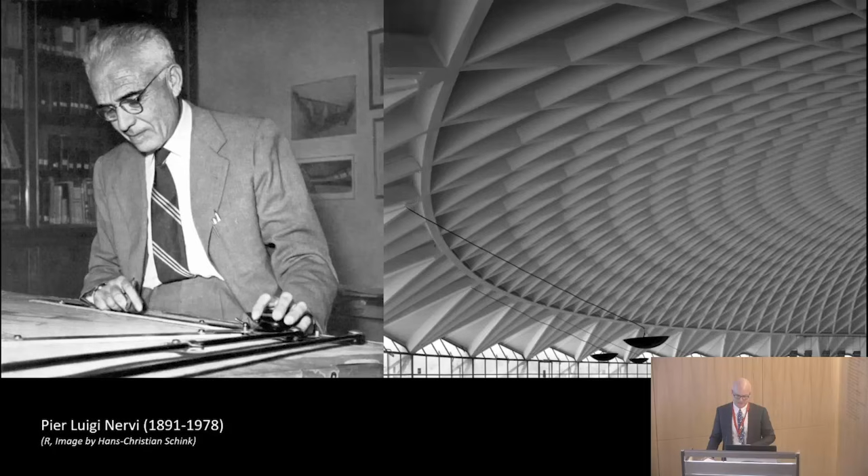And putting these two together, I say, look, one of these buildings is relatively small. The other one is huge, a record-breaking span. One of them is much beloved by everyone who walks into it, engineer, architect, sports fan. The other one was demolished just 25 years after it was built because it was so unloved, right? So sort of unbeautiful. And an incredible achievement. But the difference between these two, I think, is worth considering.

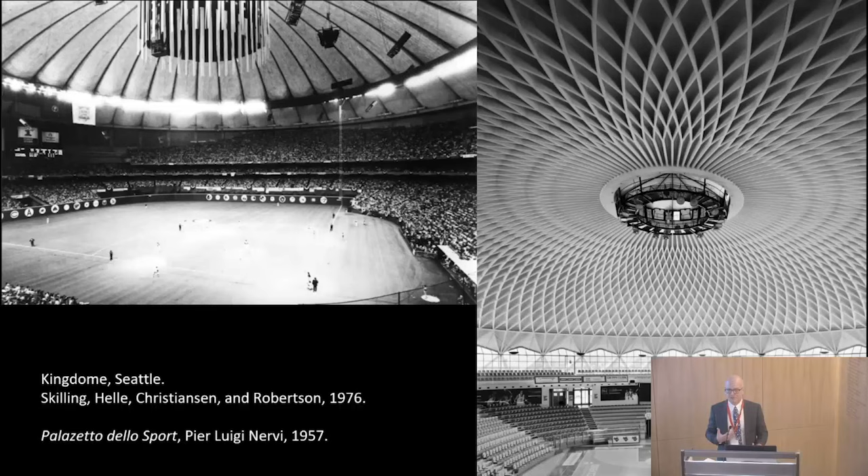And I sort of picture him going back and forth, having an idea with his sort of necktie on and white shirt, and going down to the job site in the afternoon and sort of testing those ideas out. And he came by this sort of dual focus quite honestly.

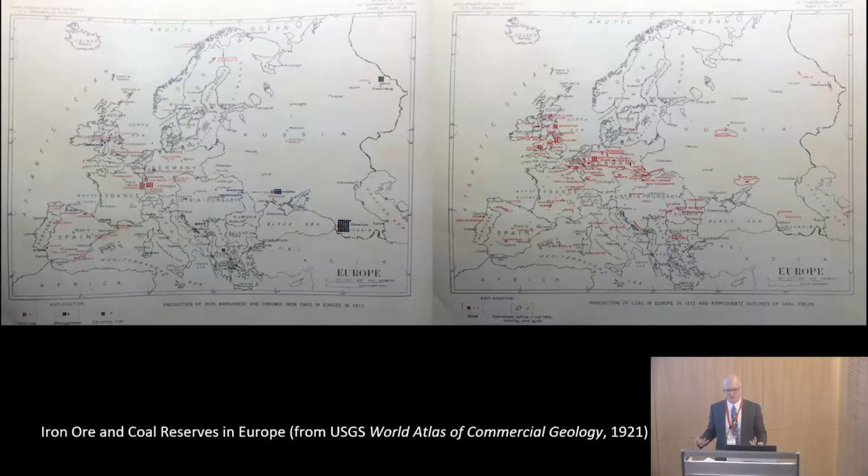And a few years later wrote this very brave editorial in a Roman newspaper called For Autarky, in which he made the case that this emphasis on brick and travertine and marble was really counterproductive, that to make the brick, you still needed to import fuel, and that you needed so much marble or travertine or brick or concrete that it made much more sense to use what little steel you could find in the smartest, cleverest way, to stretch it as far as you could, and to use the vanishingly small amounts of steel to actually stretch materials like concrete as far as possible.

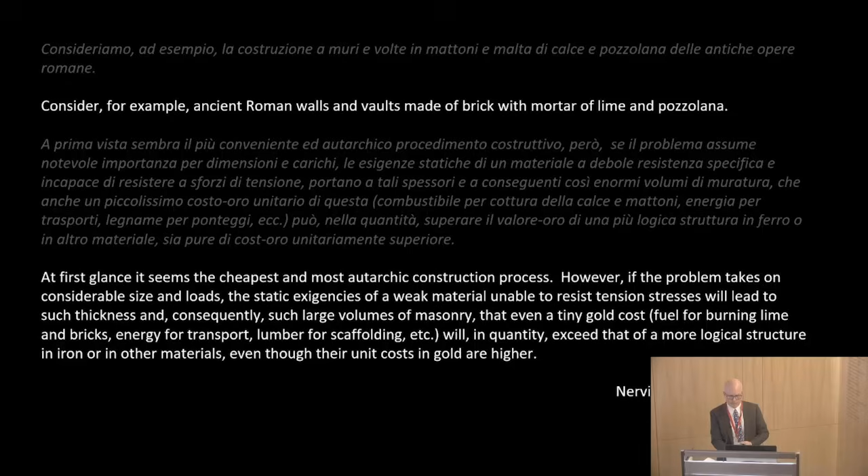And his point here was that if you wanted to be really autarkic or really self-reliant, reinforced concrete really was the material that you wanted to turn to, not travertine, not brick. And he had some early successes in reinforced concrete that proved his point.

And Nervi's point was this is what a truly self-sufficient, truly autarkic structure should look like, where you are engineering the concrete so that you're using as little of it as possible, as little fuel as possible, and you're using reinforcement as wisely as you can to stretch that material.

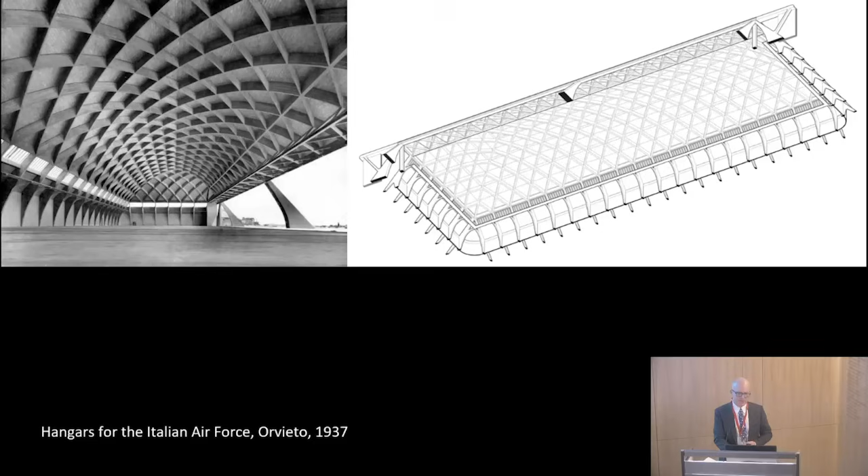Nervi, however, is not so pleased with the results. And later on, he writes that he sees 2 problems with these hangars. In the first case, he says that because they rely on monolithic behavior, he's had to go and actually build the building twice. He's had to scaffold and form it out of timber, and then he's had to come back and actually pour the concrete. And timber being not quite as scarce as steel, but still quite scarce, he realizes that this is a waste, that he's essentially thrown out a whole building's worth of timber to create this formwork.

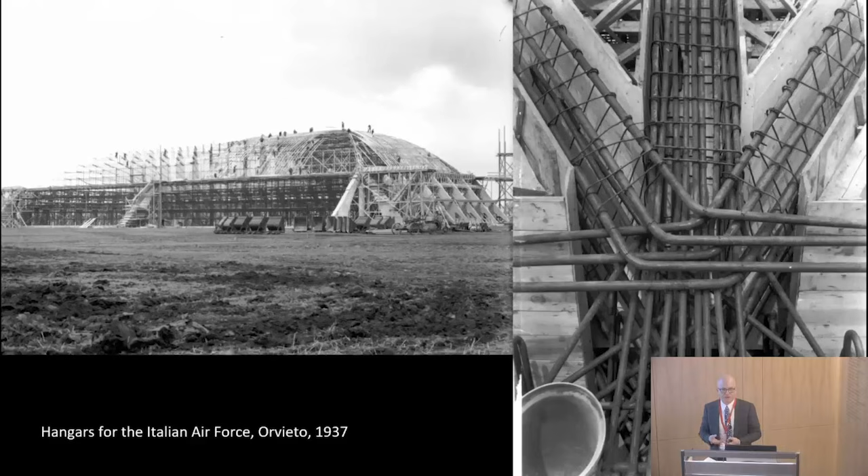And the Air Force doesn't quite realize this, but Nervi is genuinely embarrassed later in his career to show this image and to say that even though this appears to be a concrete building, when the vault comes down near to the buttresses, it really is more of a steel building. And so he's determined to try to solve these 2 problems. How do you not waste all of that formwork, and how do you reduce the weight of the roof shell so that you're not having to provide so much steel to take the forces as they come down?

And it's here that Nervi sort of switches from, I would say, being a more purely structural engineer to being more of almost a contractor, and trying to think through these hangars as a problem in execution instead of just in design. Over the course of the next couple of years, the job yard in Magliana is full of these experiments where Nervi tries to precast arch forms that will take the place of the poured-in-place lamella grids that he's made at Orvieto.

And his reasoning is that if you precast these, you can achieve much tighter tolerances in a precasting yard than on site. And therefore, you can create shapes that are more efficient. So you can remove the kind of dead weight or the concrete that's not doing its job quite so efficiently toward the middle of the members.

And you can also sort of telescope the amount of time it takes to build the foundations and the supports with the amount of time it takes to fabricate the arches themselves, that you can do them both at the same time, and thus not only save in material, save in formwork, but also save in schedule.

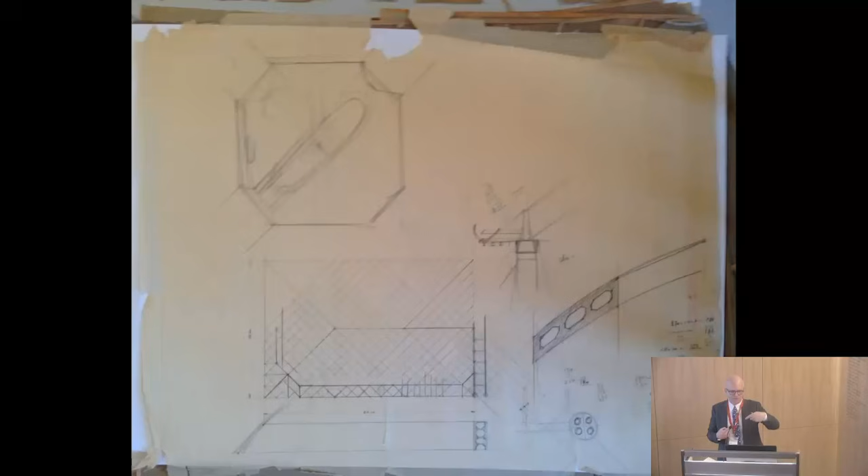And then in the upper left, he's thinking about ways to take those precast elements and to make them behave like a monolithic shell. And what you're seeing there on the corners of that octagon are 4 precast truss members. Each one of them has a loop of reinforcing steel that sticks out of it. And the octagon is actually a small plug of reinforced concrete that he'll pour to actually hold those 4 elements in place together to create a monolithic joint out of 4 discrete precast elements.

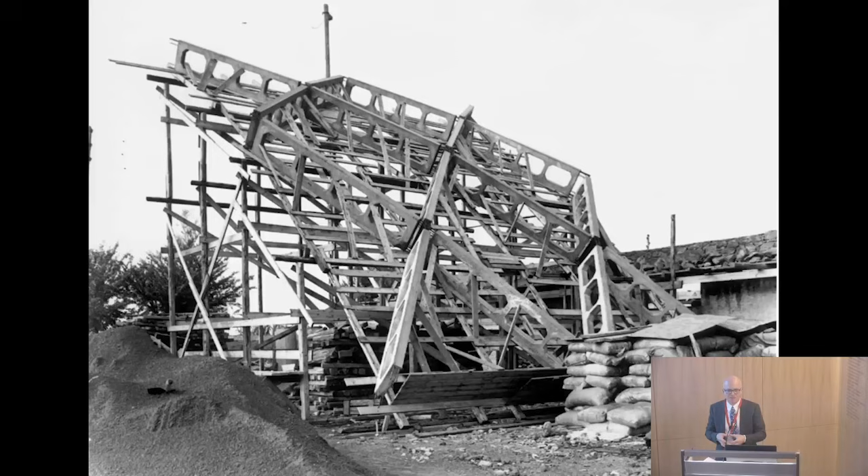This experiment in the Magliana yard is sort of the proof of concept, and you can see that he's now using Vierendeel truss elements, and he hasn't yet poured the concrete to sort of weld them together, or to connect them together monolithically. But you can see that these are being supported on a very, very light set of wooden scaffolding. And of course, there's no formwork. The formwork has been placed on the ground, and it's been reused again and again and again to create each family of similar truss shapes.

And this principle of prefabricating the elements and hoisting them into place saves weight because the shapes can be more efficient, but Nervi realizes that it also saves construction cost. And later in his career, he taught structures to architecture students at the university in Rome. He has this, I think, a really telling definition of construction. And he says that the fundamental problem in construction is moving weights, lifting heavy things into place.

Nervi's contracting firm is relatively small, a small group of laborers. He doesn't own his own equipment. He has to go and rent the cranes and hoisting equipment for his job site. And he realizes that if he breaks the building down into smaller and smaller pieces, he'll save money on renting the cranes themselves, and that's a substantial amount in his budgets. So prefabrication not only allows him to do more effective shapes, but it also saves him money on the hoisting equipment that he has to rent.

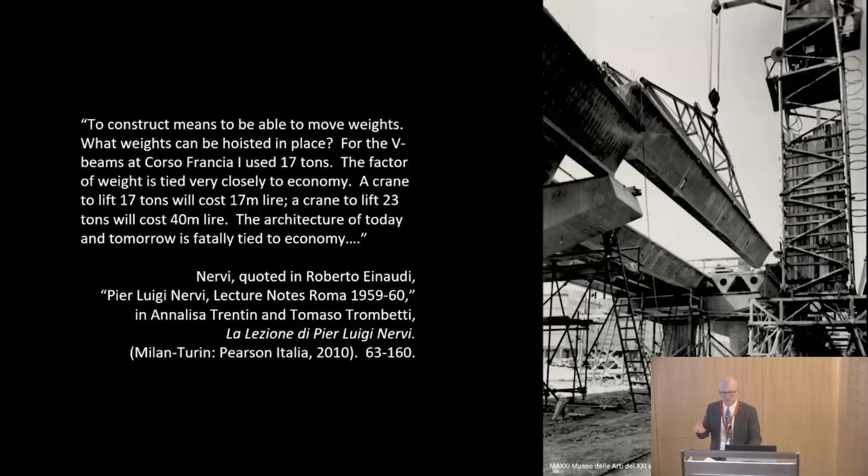This is the Corso Francia in Rome, where you can see that he's broken the scale of this highway viaduct down to spans that he can use a relatively small crane for. And here that building is today. And you can maybe see where this is heading, that this has a scale to it, a sort of human scale that most highway viaducts don't, because Nervi is under the constraints of having to use these small pieces of equipment and therefore having to break his spans down into smaller and smaller elements.

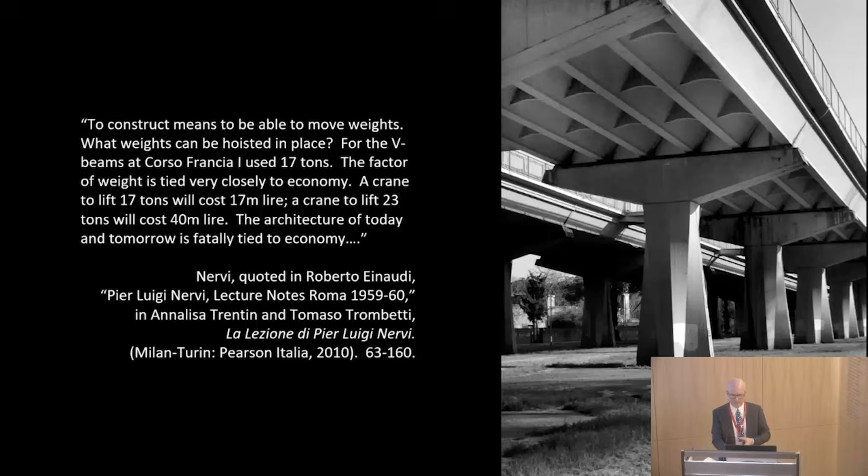So in 1939, he wins a tender for another set of hangars, these on the Italian coast. And he proposes to do them using exactly this method, to precast all of the elements on the ground while the buttresses are being built to support the roof, to hoist them into place using very lightweight equipment, and as you can see in the background, to use a traveling scaffold that will allow him to place each of these, to pour the small quantities of concrete, and basically to have that scaffold just move down the job site almost like an assembly line, right, leaving behind the hangar roof as he goes.

That's Nervi in the front there, looking fairly satisfied with himself, behind one of these truss elements. And on the right, you can see what I think is another sort of critical moment in Nervi's career, where for the first time he looks at the building almost finished, and instead of just documenting it through typical job site photographs, he commissions Studio Vasari, which is Rome's finest architectural photographer, to come to the site and to take pictures of the structure before the roof is put on.

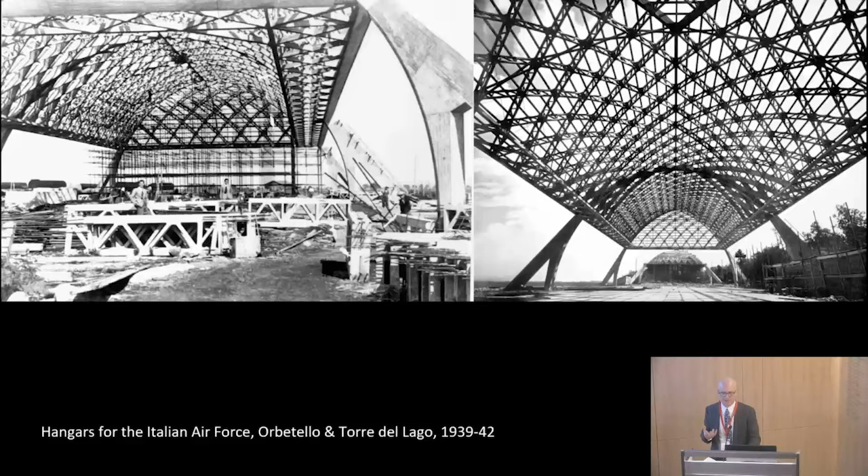And that, I think, is an interesting moment where Nervi realizes that almost by accident, right, by taking so seriously the constraints of the structural problem, and by distilling those through this kind of language of the job site, he's created something that has a kind of architectural nature to it, right? That he's created something beautiful out of these very sort of rudimentary ideas about structure and precasting.

And as evidence for this, I submit that the drawings for this project, they're only partial in the archives, but there are three types of drawings for this second set of hangars. There are, as you can see on the left, beautiful hand-drawn graphic statics calculations for every single rib and juncture around the base of the hangar, calculated by hand, obviously, in 1939.

In the upper right, you can see scaffolding drawings where Nervi is laying out the geometry of the roof and then laying out the scaffolding that he will need to build it. And on the lower right is a shop drawing, essentially, for the truss work. There are almost no drawings in the office of what these hangars were going to look like. There was no sort of intent to think about them visually or to think about them as pieces of architecture.

Nervi designed the process. I think he had some subtle bits of intuition along the way that maybe tweaked things just a little bit, but at the end, this process leads to this very, very dramatic work of almost pure aesthetics, right? Something that Studio Vasari comes out and takes photographs of.

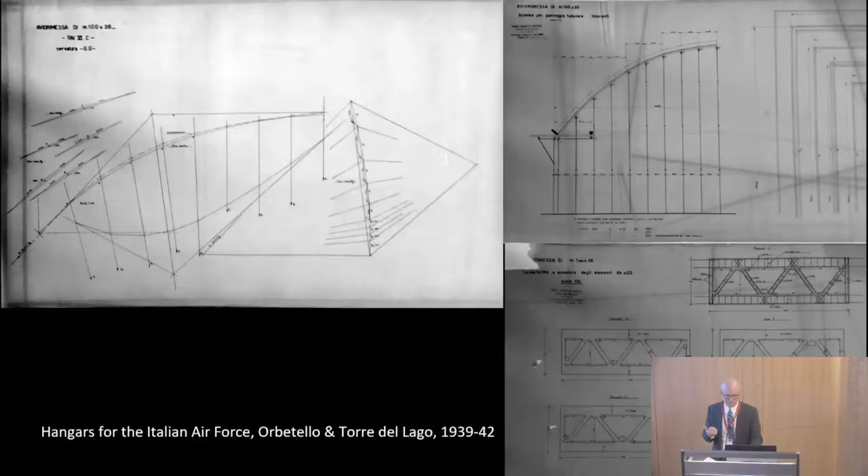There's one more wartime experiment that I think takes this sensibility to even a greater level. And that's this rather desperate commission that the Italian Navy gives him in 1942. Even more than the Air Force, the Italian Navy is under pressure to build ships, but to do that without timber and without steel. And like the Air Force, they go to the country's engineers and they say, is it possible maybe we could build ships out of concrete? And Nervi says, of course.

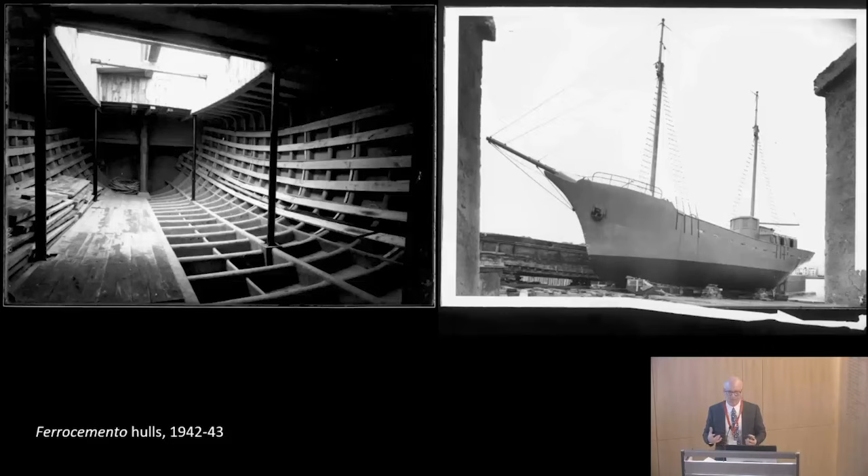And he's given a shipyard that has no hoisting equipment, no electricity, and no power, and is told we need 3 of them in a hurry. And he actually builds these 3. And the secret turns out to be taking advantage of the one resource that he does have access to, and that is labor, and particularly unskilled labor that is migrating from southern Italy through the peninsula during wartime in search of work.

He adopts an old French technique that in Italian is called ferrocemento, where you take thin sheets of metal mesh, which is a fairly cheap, fairly easily obtainable material even in Italy, and you lay those layers on top of one another and then impregnate the results with a very lightweight sort of zero aggregate cement. And you wait for that to cure and you're left with a very thin material that behaves somewhere between concrete and steel, right? Not as thin as steel, not as ductile as steel, but also that's able to take a fair amount of bending loads.

He takes very minimal amounts of rebar, bends them around jigs, and then sets loose a small army of laborers to just simply trowel cement into the resulting shapes. And as a result is able to build these concrete hulls with, again, no hoisting equipment and no power on the job site or in the shipyard.

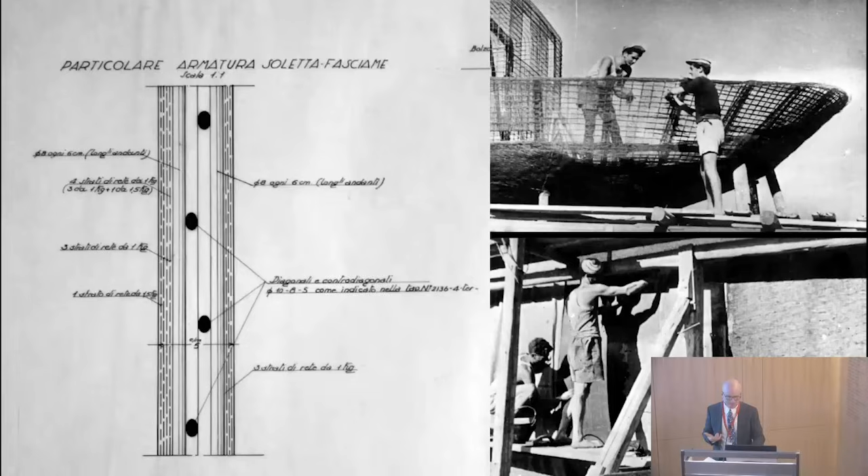And this Nervi speaks about as sort of the other great lesson to him, that prefabrication lets him save weight and lets him save time, but ferrocement actually allows him to take that weight savings and double it. And he says, talking here about the Stadio Flaminio, where he adopted the technique for these sort of flying roof forms, that if you were to do these just out of prefabricated concrete, you would be left with a minimum of 3 inches because you need the space for the rebar and then you need protection on either side. But with ferrocement, you can actually reduce that to 1.5 inches.

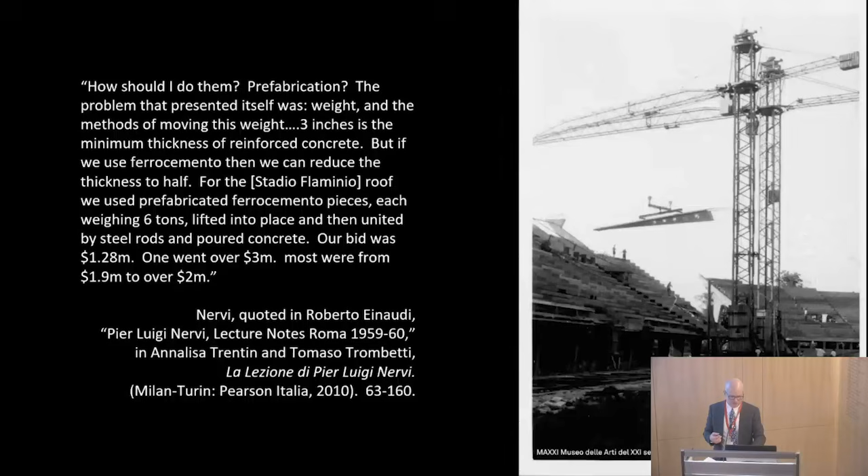And so you're taking the savings that you already had with prefabrication and you're essentially doubling them, right? You're halving the weight again of the finished element. You can make these in much more refined shapes. If you look closely, you can see, maybe not so much here, but in the construction photo, that these blades for the Stadio Flaminio roof start in a very deep hollow wedge at the root and then taper to a very flat blade at the tip. Right? So perfect cantilever shape, but sort of spread out in these curving forms that cover the grandstands as well.

And as you can see, he is tied to the economy of this, right? He has to rent the cranes, and so he's sort of forced to save more money than any of his competitors, and therefore wins the commission.

So the first moment where Nervi takes these wartime experiments and really applies them to a building comes in 1947, when the city of Turin agrees to host the International Automobile Exposition in 1949. And this is an exposition that Turin has hosted before. They're the home of Fiat, so they're sort of the automotive center of Italy.

But Turin, of course, is devastated in the war. It's one of the most heavily bombed cities in Italy. And their exposition center, along with much of their industrial capacity, has been utterly destroyed. The good people of Turin say, that's fine, we'll build a new one and we'll give some lucky firm 8 months to design and build a whole exposition center. And Nervi and Bartoli are the one firm that accepts the challenge and bids on the job.

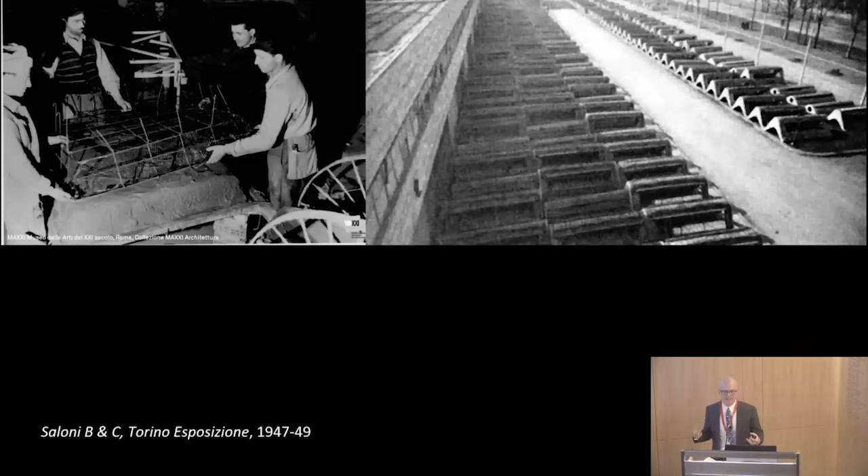And what Nervi decides to do is to take the sort of lessons of the shipyard and, instead of large ship hulls, to apply the lessons of prefabrication from the hangars and to instead create these little tiny sort of boat-shaped elements. I think of them as canoes or sort of kayaks. They're that sort of scale. Using ferrocement, using those teams of unskilled laborers to just turn these out almost as an assembly line while he is pouring the foundations and the supporting structure for the exposition center.

Once these are all finished, he develops a process where each one of these little boats will be lifted up into place and sort of slid down on a rail, grouted to the one immediately adjacent to it, to form these long, low, folded plate arches. And again, there are 3 or 4 structural principles at work here. Overall, it's sort of a 2-hinged arch. If you go in the other direction, it's a folded plate of very, very thin ferrocement. So 3 or 4 ideas getting sort of put together to create this one super efficient, very thin shell roof.

And as you can see on the left, he realizes that he doesn't even need a crane, that every one of these pieces is actually hoisted by a winch using human labor to bring it up, and then human labor again to just slide it down into place. So this is a huge exposition hall that's built entirely by hand labor.

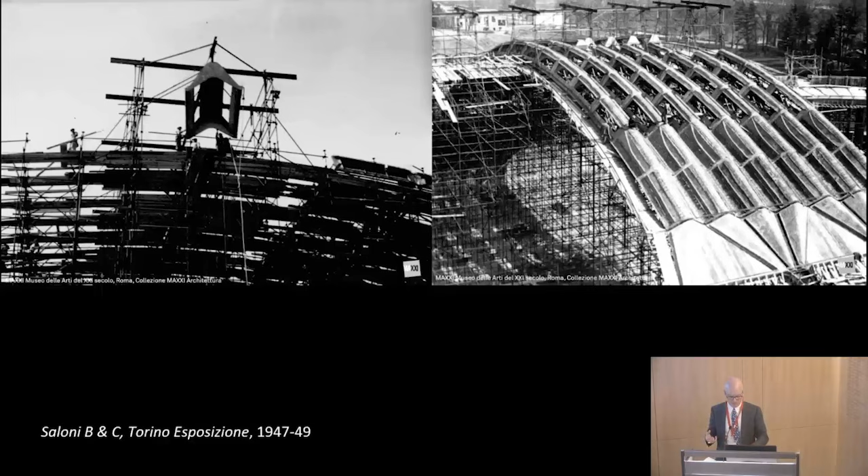And here's the result. It opened on time, on budget, hosted the auto show, and Nervi, speaking about it, professed to be almost sort of baffled that it was also so beautiful, right? That it was such an amazing kind of space inside. I would argue that what you're looking at here is not just the span itself, but the span and the pattern of its execution, right, and its fabrication, and that there is almost like a human scale that's been imprinted onto this otherwise sort of sublimely large space.

Now, there is one complication that would prove sort of critical to the next stage of Nervi's development, and that's the half dome that you see on the right of the slide. Nervi tried very hard to convince the clients that a half dome was a crazy shape to try to build out of concrete structurally, that the thrusts at the corners in particular were just going to be too great, and it was too complex a geometry to handle. But the client said, no, we need this kind of apse, the kind of court of honor. Here's the plan. You decide how to build it.

And as you can see, there are really these two separate halls. There's the very efficient extruded arch of the main hall, and then there's this apse around the back. And you'll notice that the apse has this very striking kind of radial pattern, almost like a sunflower.

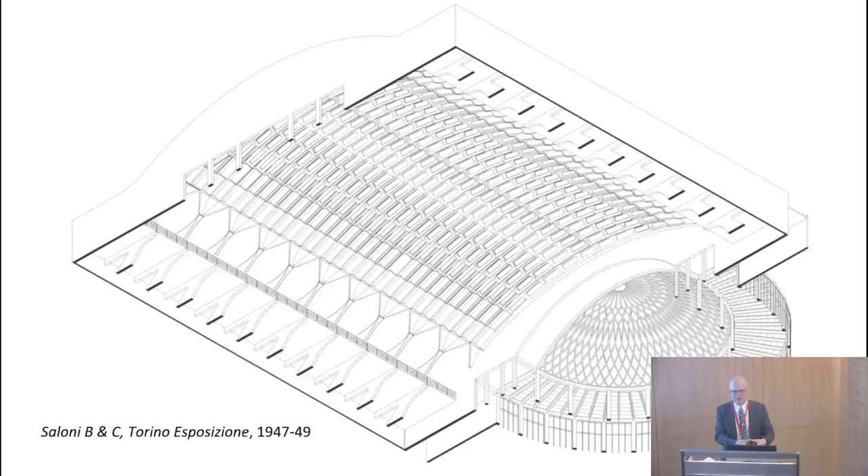And this was the result of Nervi's realizing that if he had a ferrocement yard going anyway, he could be manufacturing the structural components for one roof, and he could be manufacturing formwork for a thin shell that would cover the other roof. And so he set to work, having his team build hundreds of what he called tavelloni, or little tablets. These are diamond-shaped pans, each one about a meter by a meter. And as you can see, they're very thin, and they're formed out of the same ferrocement that the roof elements of the main hall were. They're designed to be basically coffers.

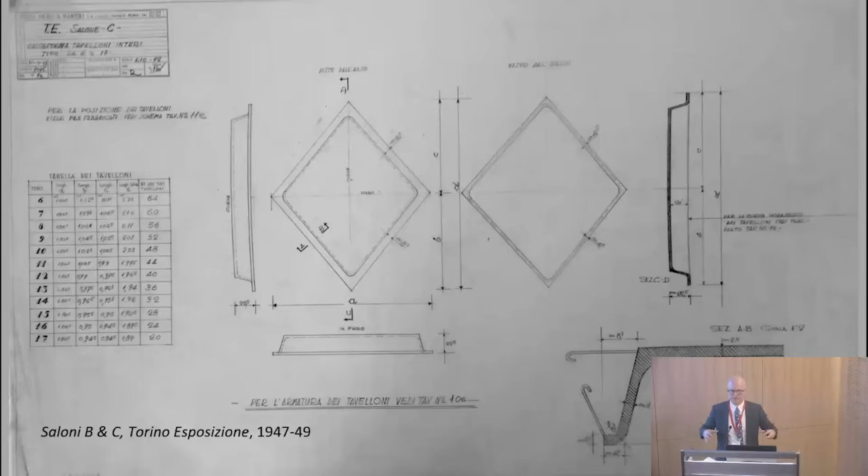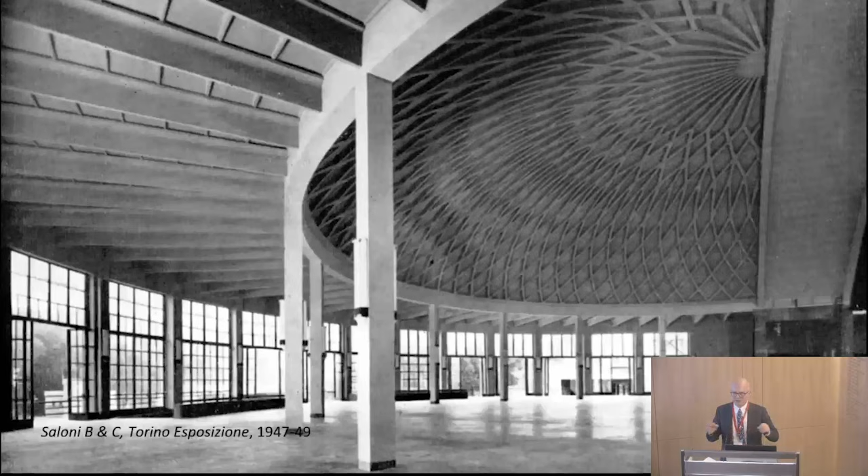As a result, once concrete is poured over the backs of these, the pans are left in place, the joints are grouted, and you then get this pattern of ribs, again, just like that first set of hangars, stiffening a very, very thin shell of concrete behind it. And because the weight is so much less, the thrusts are less, and therefore he can get the half dome to work. He says later in his career that this is still a crazy form to try to build, but if the kind of architectural impulse is to have you build something that's crazy, you at least have to find the most rational way to do it.

This idea of using ferrocement not only structurally but also as formwork is an idea that he uses in a number of different ways. And a couple of, I think, his most interesting and most underrated buildings use exactly this technique to build factory slabs. This is a factory or a warehouse in Bologna that he built for the state tobacco interest just after the Turin Hall was being finished.

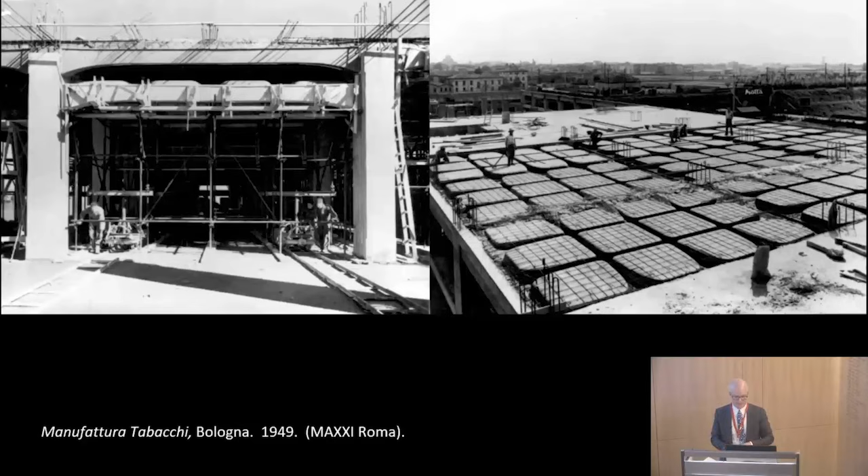But the result of this is, I think, a really subtle detail. You can see that because of the curved shape of the pans, the joists for this slab all sort of flare out gently as they approach the girder. And Nervi writes about this as acknowledging the fact that the shear stresses in those joists get just slightly greater, right, as they get toward their supports.

He says, of course, the easiest way to do this is just to add a little bit more reinforcing steel. He says nobody in a tobacco warehouse is likely to know this, but he's kind of having fun, right? That this is a way that he's sort of signing what would otherwise be a very sort of prosaic building. It's a detail that I think is kind of genius for the small scale of its intent.

More famously is a wool factory outside of Rome, where he uses ferrocement pans to express a kind of larger structural idea, which is the isostatic diagram of stresses in this two-way slab. And so you can see the pans are quite elaborately shaped, but because they're used again and again and again, and because they're molded from one mold, he can make them any shape he likes.

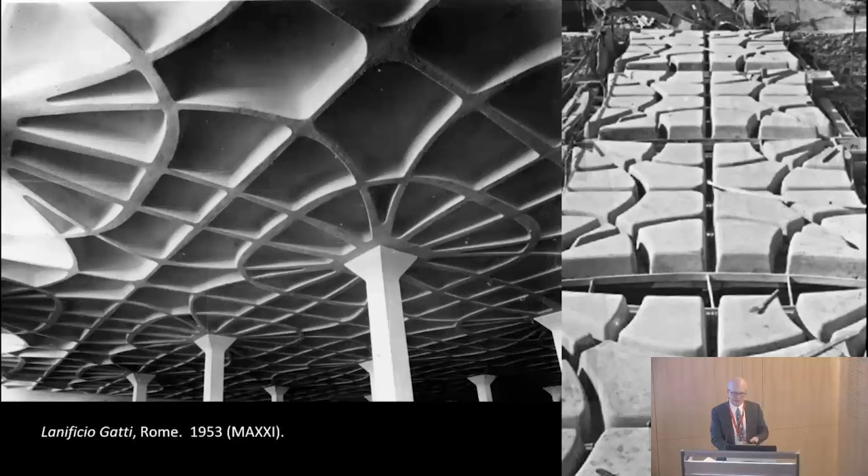And as more recent critics have pointed out, this is the isostatic diagram for a flat slab, and once you turn that flat slab into a ribbed slab, the diagram changes dramatically. And so this is purely ornamental. Right? This is not really doing anything that a simple waffle slab would not. Again, I think it's Nervi kind of signing the piece almost, right? Using a constructive technique to reveal something about the statics behind it.

So the greatest kind of confluence of these ideas is, I think, the Palazzetto, the small sports palace that he builds for the 1960 Olympics. In 1957, Rome has decided to compete for the Olympic Games, or to propose that they hold the Games there, as a way of sort of reintroducing themselves back into the community of nations a decade and a half or so after World War II.

Nervi is on the committee that is charged with building a demonstration arena to show the International Olympic Committee that Italy is capable of building this many structures this quickly. He helps write the tender, and then he turns around and bids on the tender and is the only bidder.

Nervi was not only a great engineer and contractor, he was a brilliant businessman. And this being Italy, everyone sort of turns the other way and lets it happen. And thank goodness, because I think this is undoubtedly Nervi's finest, most distilled work. But as you can see, again, it's in many ways a very simple building.

I tell my students that if you had enough space and enough time, you could almost go build the Palazzetto dello Sport in your backyard, because it uses exactly the same kind of simple techniques that the Turin hall used. The job site yard on the left, you can see that this crew of 5 and probably about a dozen more laborers has just been making these diamond-shaped tavelloni again and again for weeks on end. You can see that they're small enough that a crew of 4 or 5 people can take them across the road to the job site.

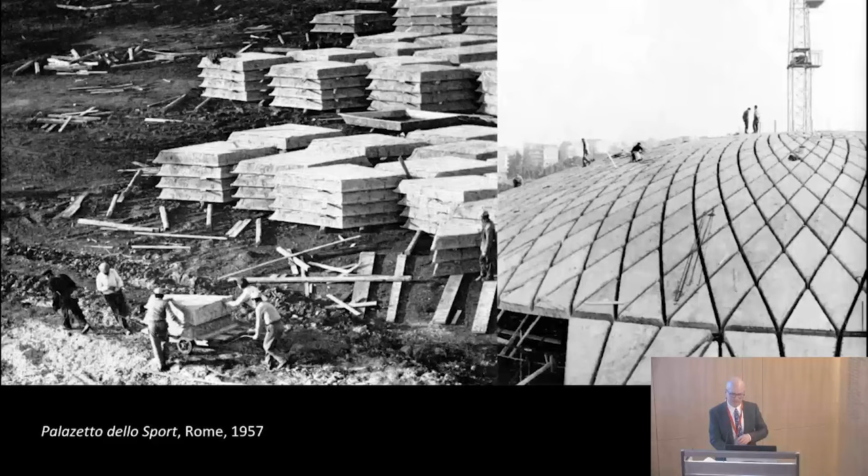Palazzetto is known for several details, the sort of eyebrows that stiffen the edge of the roof shell, these forked buttresses that very dramatically show you how the ground is going to take up the thrust from the roof. Not shown is a tension ring that's buried just beneath the ground that finally does all of the really hard work. And then on the right, of course, the result of this almost algorithmic process where self-similar shapes are fabricated again and again. They're laid out on a rough grid.

For a long time, I thought that there must have been some complicated mathematics behind this. And in fact, Nervi just built a sort of plywood form and literally just drew on the form full scale how big he thought these spirals should be. So a great sort of intuition. And as a result, this incredibly captivating space. And I think just like Turin, it's a space where you're seeing two things at once. You're seeing the statics of the span, this sublimely large span in concrete. And yet you are also seeing a record of the individual labors that made it up, right? That sort of human scale gets imprinted onto this otherwise very vast span.

The Palazzetto gets called a concrete Pantheon, and one of Nervi's contemporaries makes the point that it's one thing to bring the daylight in from the top of a dome. It's another thing to bring the daylight in from underneath a dome. And if you want to give the Romans credit for building something great back in 80 AD, you have to give Nervi credit for turning that on its head, right? And designing a dome that's so light that you can literally lift it up into the air and let sunlight and people come in from underneath.

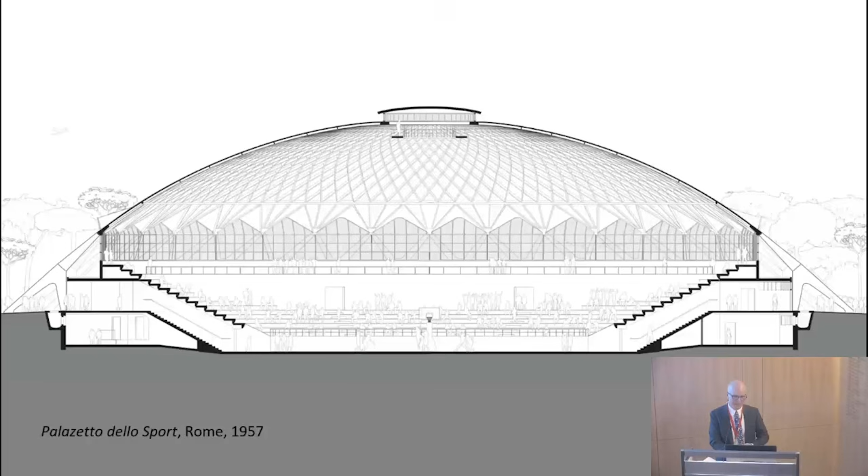So this was done in 1957. It was the largest reinforced concrete dome when it was built, and that was superseded by the other indoor arena that Nervi built for the 1960 Olympics, the so-called Palazzo dello Sport, the large sports palace, which is in many ways, I think, a slightly less elegant building because maybe it has more ideas to it. But the fundamental move for the roof was to take the roof idea from Turin and, instead of doing it as an extruded shape, to actually do it as a rotational grid.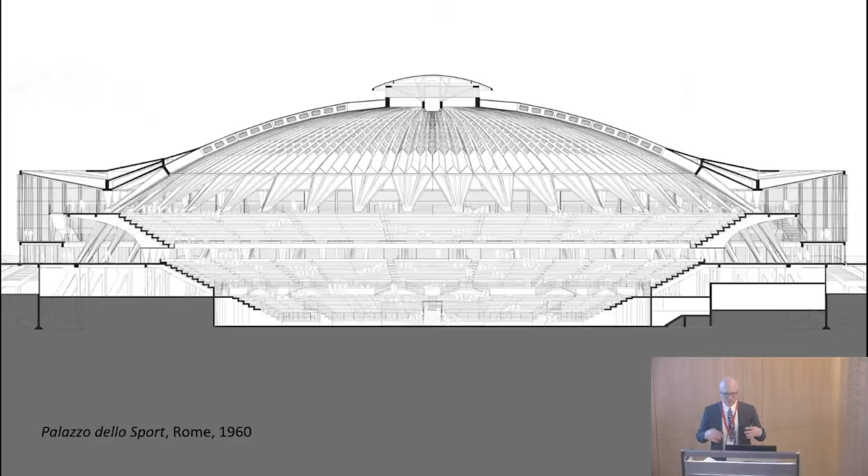So these, you can see, these folded plates are all made of ferrocement again, brought into place by a lightweight crane and grouted to one another around the circumference to form this span that sits on these kind of almost Gothic buttresses, right? These fan-shaped buttresses at the back.

Now, interestingly, when Nervi comes around to designing the seating, he almost can't help himself, and he reverts, as you see on the right, to sort of rendering the bottom of the seating bowl in the same ferrocement pans that he's used for the Palazzetto. And I see that almost as a kind of acknowledgement that one system maybe tells you a little bit more, or is a little bit more expressive than the other.

The Palazzetto, I think, has aged a little bit better, again, because of its simplicity. But the Palazzo is a building that puts Nervi, again, back on the world stage at age 70 at this point, and he enjoys this kind of second celebrity career. The public's very impressed by these buildings.

They see them. The 1960 games are some of the first to be televised, so when America tunes in to see Cassius Clay win the gold medal in boxing, he does it in a Nervi building. And Nervi's reputation sort of takes off, and he becomes this kind of celebrity engineer almost.

The Palazzo, just to show just how resonant this building was, right? So here is an engineer working on an incredibly tight contract, budget-wise, schedule-wise, who produces something in concrete using mostly unskilled labor in the job site yard. And the result ends up being published in a fashion spread in Vogue magazine a few years later. I don't know how many of you have had your work published in Vogue, but this is amazing, right?

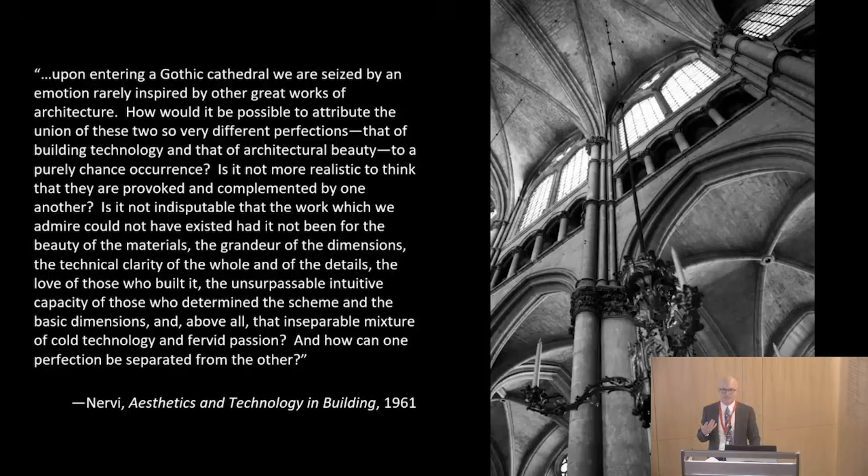This book was the result of the Charles Eliot Norton Lectures in Poetry that he gave at Harvard University in 1961. And this, I think, gives us some idea of just how resonant these buildings were, that an engineer in concrete, someone whose whole career was based on impossible budgets and deadlines, ends up giving these lectures on poetry at Harvard. And Nervi's own philosophy, I think, begins to touch on this.

He talks about the idea that architectural beauty and building technology are related to one another, and that the fact that they complement and provoke one another has something to do with his own idea of why he makes beautiful things. And so to close, I want to speculate just a bit. If a structural engineer can give the Norton Lectures in Poetry, then an audience of structural engineers, I hope, will put up with me while I talk a little bit about why I think poetry might be the right way to talk about Nervi.

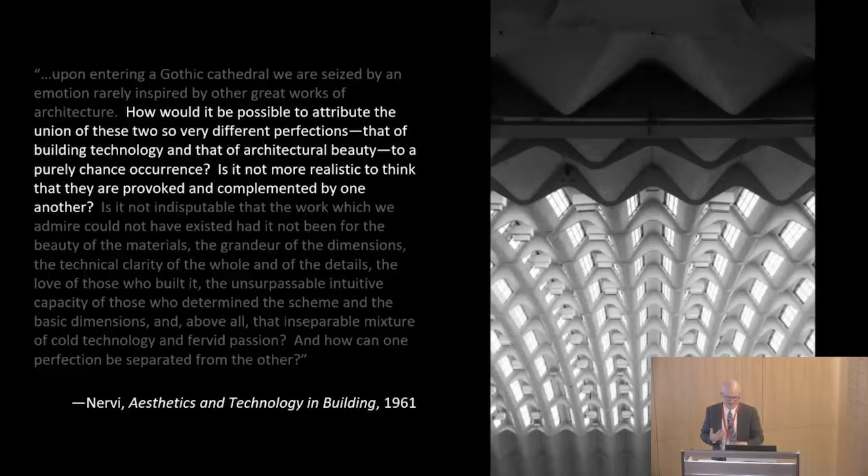And as I do this, I'll show you some images that we commissioned from a German photographer named Hans Christian Schink to use as the gatefold in this republication of Aesthetics and Technology. And he, on his own, came up with the title for this portfolio called The Shape of Beauty.

So, given the deeply pragmatic nature of Nervi's approach, it seemed miraculous to contemporary critics that he should have been able to achieve the poetry in concrete that he did. Wrestling beauty from the most unforgiving and unlikely of circumstances is an irresistibly heroic tale, and his status as a poet in concrete was inevitably mentioned alongside accounts of his projects' thriftiness and efficiency. And yet maybe this shouldn't be so surprising given the nature of poetry itself.

Its whole point, after all, is to condense moments of beauty out of concise, elusive forms that resonate beyond their meaning or their economy of breath or print alone. The claim of Nervi as a poet may well be more insightful than it first appears.

Rigor of beauty is the quest, noted American poet William Carlos Williams in his 1946 epic Paterson, a phrase that I've used as the title to my study of Nervi's processes, and one that suggests that rather than an exultant leap, the poet's quest is really one of diligence.

The challenge of poetry is not simply conveying an emotion, it is rather to do so within the constraints of accepted rhythms, meters, and schemes, systems of rules that force choices about words, phrases, and pacing, the expression of feelings and ideas according to one definition that's given intensity by distinctive styles or rhythms. The discipline imposed by these conventions and rules distills, by necessity, emotional content into poetic efficiency.